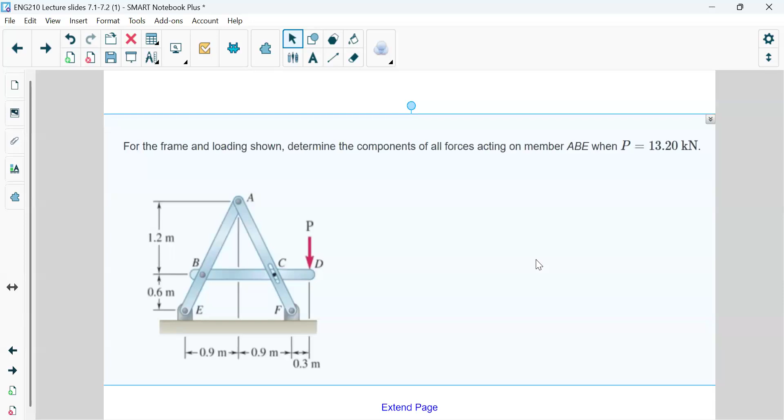Okay, so this is a homework problem out of 6.3. So let's look at this - I told you it was out of 6.3 and it does say for the frame. So we're assuming nothing is moving on this problem, correct?

All right, so let's think about the steps we're going to take to solve this problem. What would be the first thing we would need to do? Reaction - we're going to want to find those reaction forces. So let's go ahead and do a free body diagram and solve for our reaction forces. Blow this up so I can actually see it.

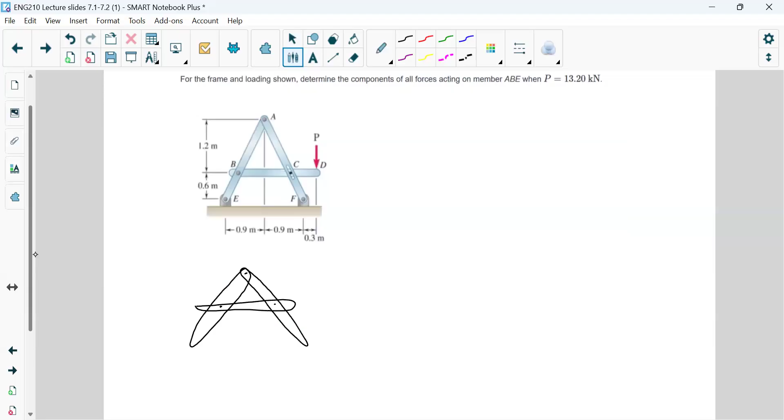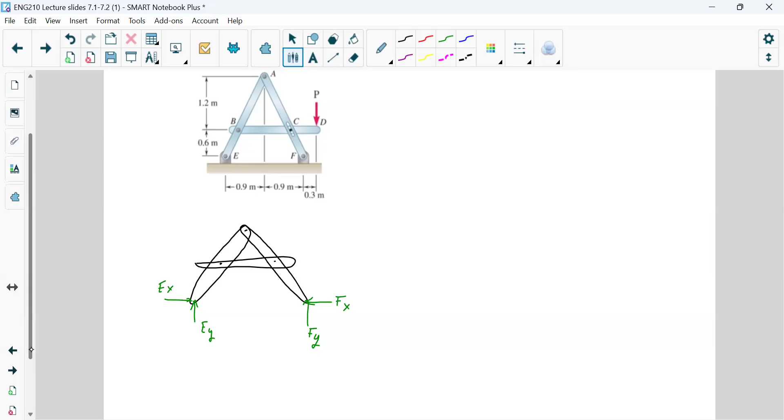All right, so our free body diagram is gonna look something like this. And then what Ben and I were talking about before class was we're gonna start by solving the reaction forces, treating this as one unit. At E, that's a pin connection, so we have an EY and an EX. At F, we also have a pin connection, so we have an FY and an FX. And then we have P, and your number might vary from mine, but P is 13.20 kilonewtons, and P is offset from X.

So let's go ahead and walk through this one. Let's go ahead and start by taking a moment - we're only going to be able to solve part of it, but that's okay, it's going to give us some information to get started. Let's go ahead and take a moment about E.

All right, so our moment about E, we're going to set that equal to 0. So my Fy is then going to be off by 1.8 meters, and I'm seeing this is 0.9 here and 0.9 there, and it's going to be turning, I believe, counterclockwise. So my Fy times 1.8.

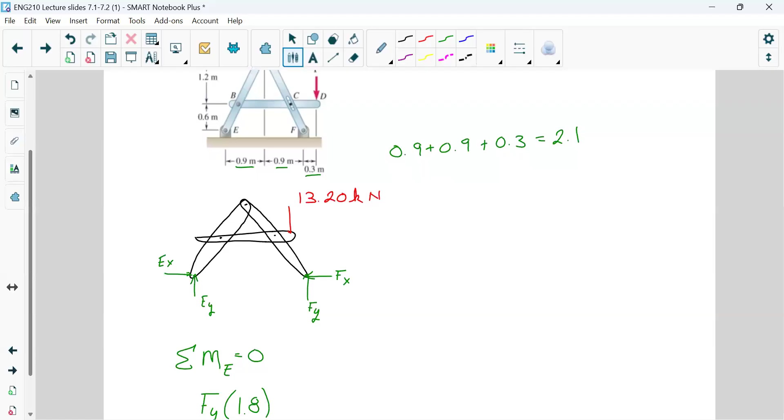The 13.2, that's also gonna contribute, isn't it? So that's gonna be pushing clockwise, and it's gonna be off - we're gonna have to add all three of these together. So that's 0.9 plus 0.9 plus 0.3, which is 2.1. So that's going to be minus 13.20 kilonewtons times 2.1 equals 0.

Okay, put that into a calculator. I'm seeing Fy equals 15.4 kilonewtons.

Yes, all right. We can then, if we sum in the y direction, get our EY. So we're going to have EY plus 15.4 minus 13.2 equals 0. So EY is going to end up being negative 2.2.

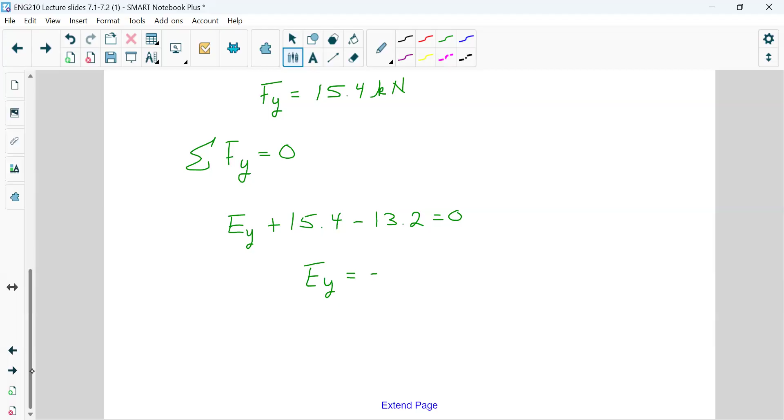All right, so this is now going to be pointing down, and it's 2.2. You didn't do FX because it's on the line of action, right? Well, FX was on the line of action when I took the moment about E. We're also going to run into another situation. If we sum in the x direction, we're going to have EX minus FX equals 0. And it wouldn't matter—if I took the moment about F, I'd have the same problem.

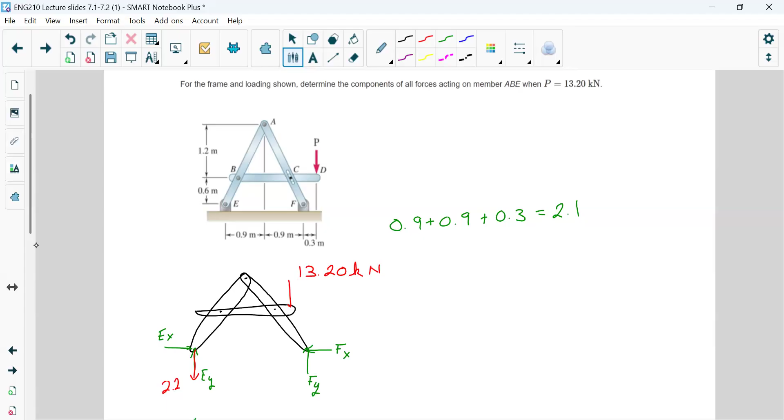So we're unable to go through and solve that. We do have a little bit more information though. Now, this is a frame. So what do we do when it's a frame? We're going to explode it—take it apart. Let's go ahead and do that.

So we're then going to have... let's see... BCD, where should we start? I guess it doesn't matter. So let's go ahead and look at this—this is going to be one of our pieces, right?

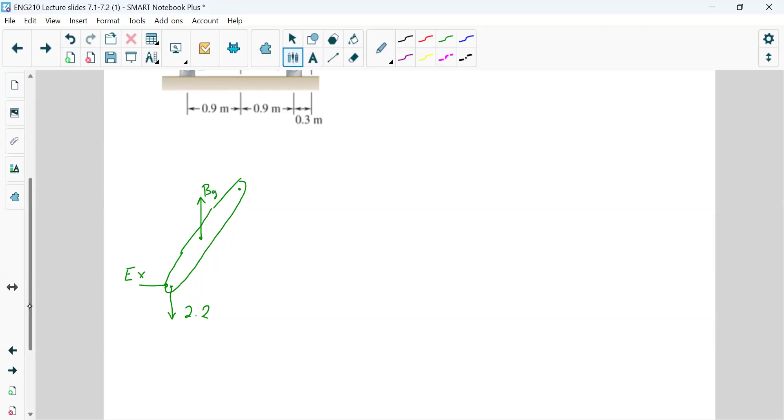We know EY is going this way at 2.2, right? I do not know EX. Here I have a pin connection, so this is going to have a BX and a BY. And up here, that's A, and that one is going to have—oh, I should have drawn those in tension. So here we're going to have AY and AX, right? So that is our first diagram, so to speak.

We take the moment about A. We're not going to get very far, are we? If we look at this one and think about it, because BY, BX, and EY are all going to contribute, right? So we don't get down to one variable, do we? If I take a moment about B, same thing. If I sum forces in Y or X, we're also going to have multiple variables. Does everyone see how we're going to run into trouble? So we need a little bit more information to be able to solve this particular segment.

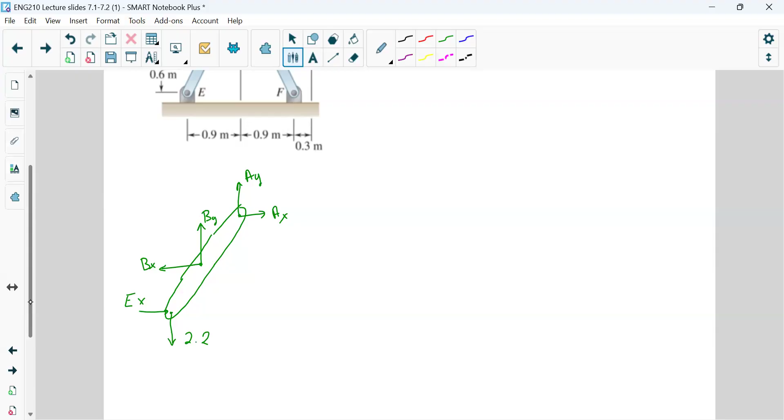So let's look at this segment here. I know I then have a BY and a BX coming in here. I've got the P hanging out on the end. So I have information on this one.

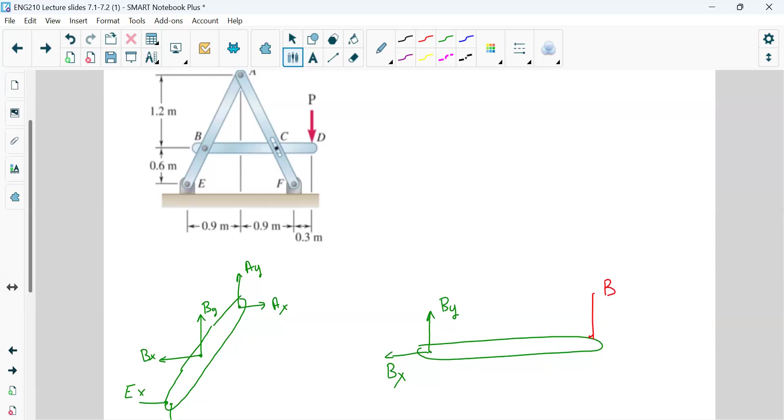And then we're going to have to talk—and this is one of the things that you brought up—the fact that it's got movement on a slant, doesn't it? So it is limited on the slant, but it doesn't clearly have a motion that's free, for lack of a better term.

Oh, this is a P. So this is 13.2, right? Okay. All right. So C is going to have both an X and a Y component to it, because it's a slit on an angle. If the slit was vertical, it would only have an X component. If the slit was horizontal, it would only have a Y component. But we have this angled slit.

So let's go ahead—this one I think I can work with. Why? Well, if I take a moment about B, what's going to disappear for me? CX. And all of B is going to disappear, and I can solve for CY, can't I?

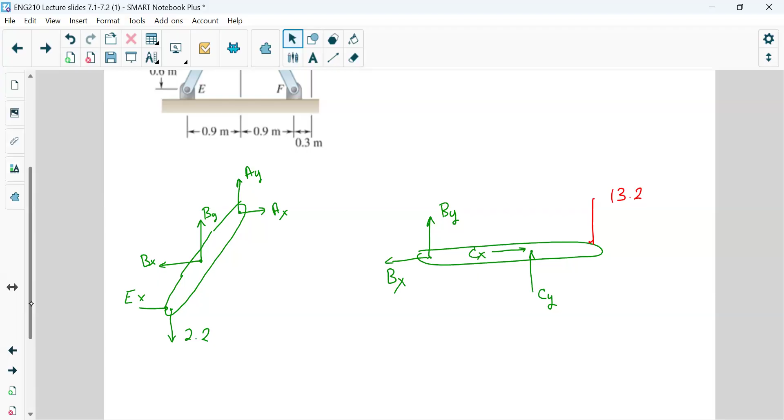I don't think it gives us the measurements on C, so we might have to take a moment at C. But we can figure out what those are. Let's try. So we know—we can figure, well, actually know that this is an F. So we'll have to use similar triangles.

Right, so if this is F here, and this is A, we know that this is 0.9, and this distance here is going to be 1.8. And so then we're going to have a secondary smaller triangle. This is going to be 1.2. This is unknown, but this is still A, so that angle isn't changing. All right, so if we then have 1.2 times—let's see, so we can run this, can't we? So we have 1.2 is to 1.8 equals X is to 0.9. X is going to be what? 0.6?

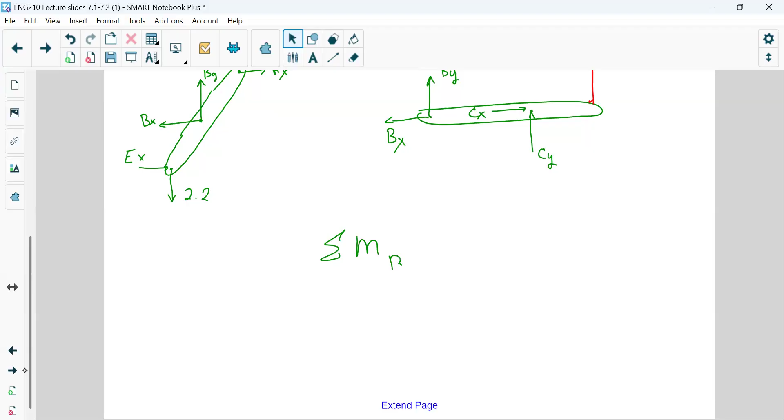All right, and then we're going to have CY times 1.2, and that would be going counterclockwise, minus my 13.2 times 1.8. That's going to equal 0. So I believe we get CY 19.8. Anyone getting 19.8 for CY?

Okay, so if we're taking a moment about B, we need to look for anything that's a perpendicular force to B. So CY is going to be a perpendicular force to B. And so is P. All right.

So we now have our CY. Can I get my BY now? Yeah.

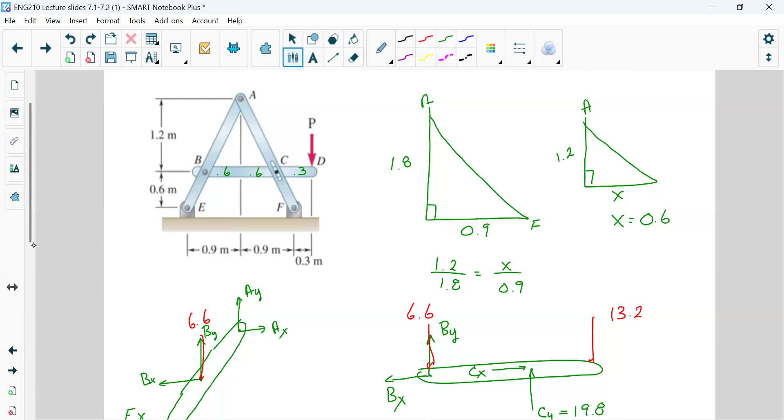That's at an angle, 2CX equals CY. Curious about where he got that from.

All right, so let's go ahead. I'm hoping we can go after CX and BX from another route. We can go back to this one and we can get AY, can't we? Right? If we go back to this diagram. So if we now sum in the Y direction, we're going to have AY, which is pointing up, minus 6.6 minus 2.2. So AY is going to then equal 8.8 kilonewtons.

For CX, could you not use a triangle to find it? Yeah, I'm thinking so. Okay, and they said I did it wrong.

So we have 6.6 pointing down here. Is it reversed on? Yes, it is. Or not? So it's going to be going up here.

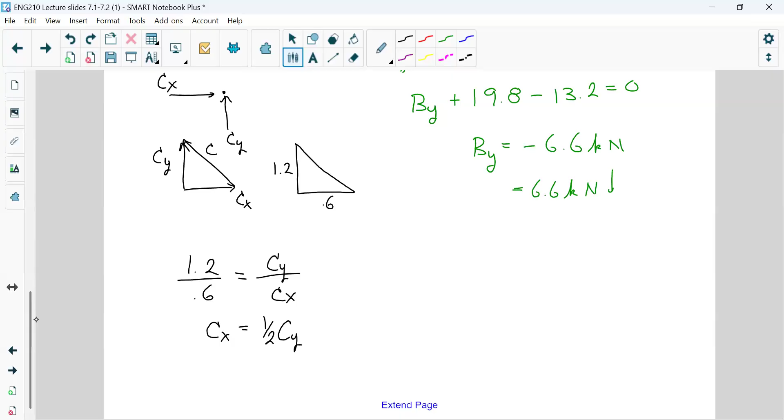Yeah, cause the left side just goes to 2. Okay, or it could be CY equals 2CX. All right, so CY, I was right the first time, equals 2CX.

We know what CY is. CY is 19, so half of that is going to be my CX. So what's CX going to be? 9.5. Wait, you said it was 19? Well, yeah, we found CY 19.8. 19.8, it's 9.9. 9.9. Is it? Yes. When did you stop writing?

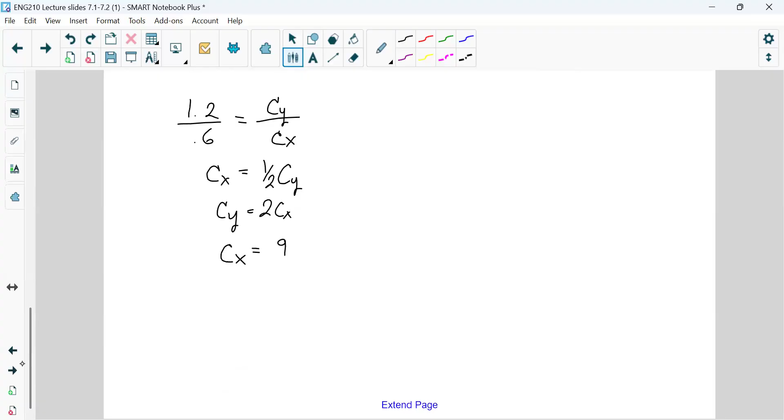Okay, so let's go back up to here. CX is then going to be 9.9 kilonewtons. Now, can I solve for BX? You read it. Yes, no, not theoretically. We can now solve for BX.

Oh, yeah, it just. Hopefully your work is much neater than this.

All right, so that's going to be negative BX plus 9.9 equals 0. So BX is then going to be 9.9 going in that direction. All right, cool, so this is now 9.9 going in that direction.

So now we can take a moment about A or E in order to get AX. Is that going the other direction? BX is going that way, so yeah, it's gonna go this way.

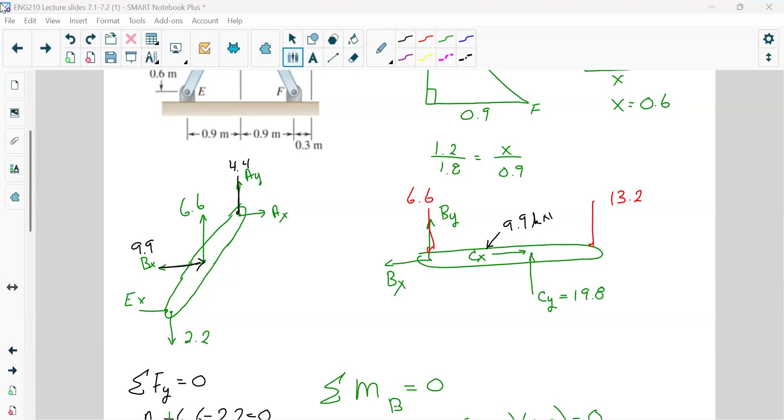Wait, why would it go that way if what we found was a positive number? Wouldn't that mean that we drew it wrong? Because the way I drew it over here was negative, goes in the negative direction. It's reacting, like you have a beam. All right, so let's grab this guy here. You know how it's drawn on this, remember, it was the opposite on that. Yeah, cause it's like when you got two forces going together, so you flip. On one it's going that way, on the other it's going that way. Oh, so yeah, however it is on one, it's opposite on the other.

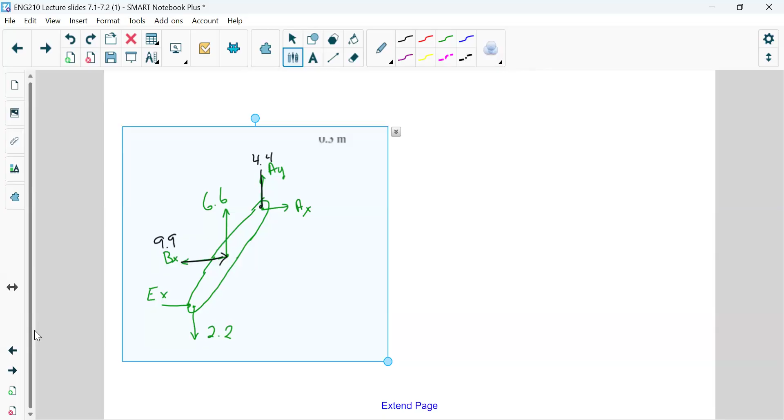Yes, okay, let's take a moment. Let's go ahead and take the moment about A. Right, we're gonna have to figure out some distances. No, we don't, we already know them.

Moment about A equals 0, right? We know this distance here, we already found. That was the 1.2 distance, correct? And this distance here is 0.6, right? Yes. And E sub x is then gonna be off by 1.8, right, because the 1.2 and the 0.6, if I'm taking the moment about A. All right, so this overall distance here is gonna be 1.8.

All right, so we are then going to have, if we're going about A, all right, so that's gonna be 9.9 times 1.2. Right, and then we're gonna have, that one's going clockwise, isn't it? Minus 6.6 times 0.6.

All right, and then we're gonna have, let's see, what else do we know? That one's 2.2, so that's gonna be counterclockwise, isn't it? So this is gonna be then plus 1.8 times. Oh, wait, I'm looking at the wrong one, aren't I? EX is gonna be times the 1.8. All right, and then we need to look at that offset 0.9. Okay, so then we're gonna have the 2.2. And I think that's positive, is it? Yeah. Equals 0.

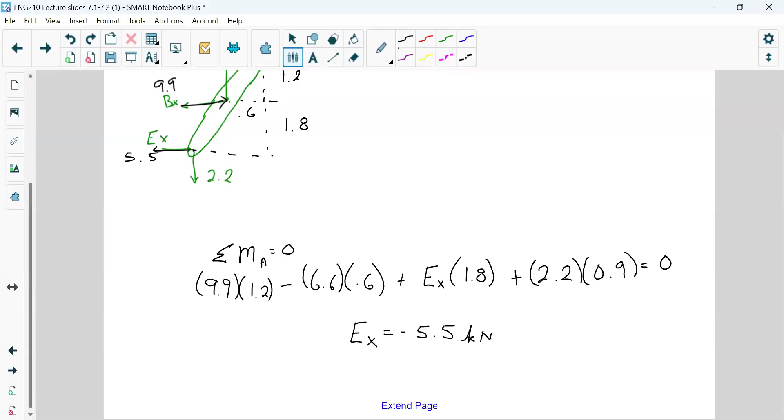So can I now find AX? So if I sum in the X direction, right, what are we gonna have? We're gonna have 9.9 minus 5.5. How did I write that? How did I draw it? I drew it positive. Plus AX equals 0.

So AX is then gonna be negative 4.4 kilonewtons. Did I do that correctly? All right, so this is going this way, 4.4.

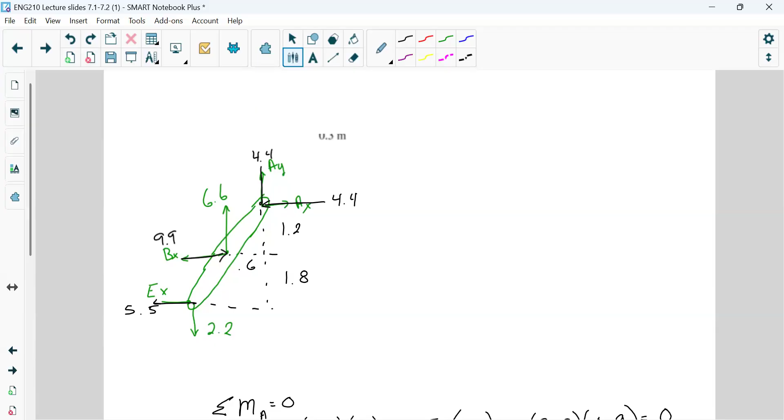Cool beans. Now, we're almost done because the only thing left to solve for is f of x, and we can go back to this one here because we just found EX. Which way was EX pointing? To the left, and it was 5.5. Yes.

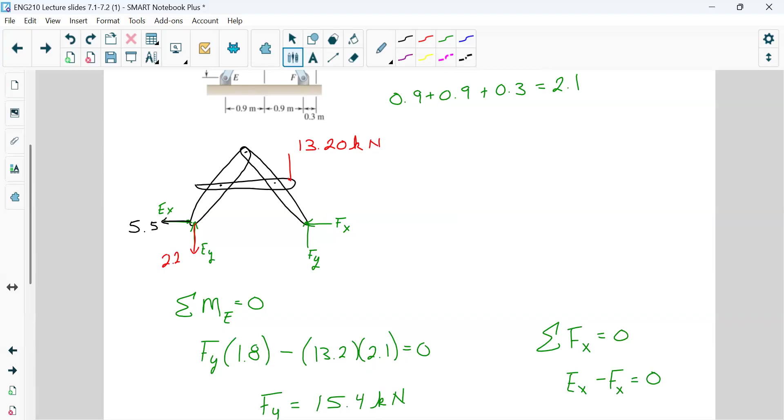All right, so if we now sum in the X direction, we know this is negative 5.5 minus f of x equals 0. So f of x is then going to equal negative 5.5 kilonewtons. So this is actually going the other way, right?

Yep, there you go. So now you solved the whole thing. All joints are solved. I was just confused on like that slider joint. I thought it was a reaction force, so I counted it and started from the beginning, but I understand. Okay.

All right, so now that was a good problem to lead us into our frame problem. Did we find the reaction forces on our frame problem? What do you mean, we found most of them?

Well, we found the left frame, a little bit, parts of the left side. Right, are we calling the forces after the joints react? Yeah, all right, so tell me what we found. No, those are forces, those are just forces. Yeah, similar reaction, all right.

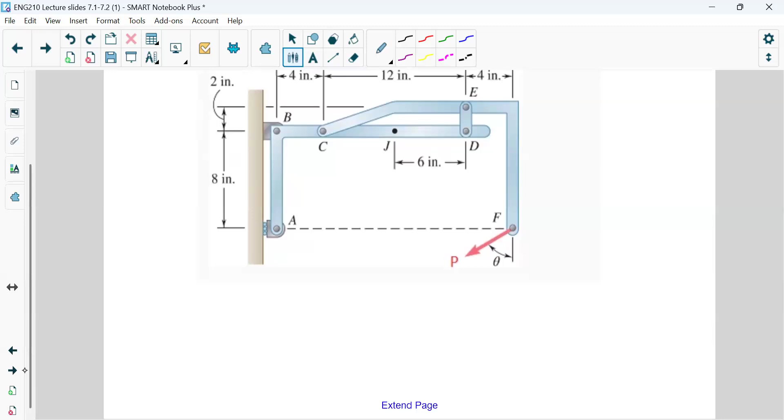Here's some notes. Okay, so it looks like we found BY and did we find BY and AX and BX? Is that correct? Yes, all right. So what do we know? Let's go ahead and give ourselves a free body diagram. And then did we show, oh, and then we need to solve for J with our internal forces, correct? Yeah, all right, and so I believe, did we leave off here?

Right, so A was 155. B was 155. This was 62. Here we're going to have a CY and a CX, and then here we're going to have a DY.

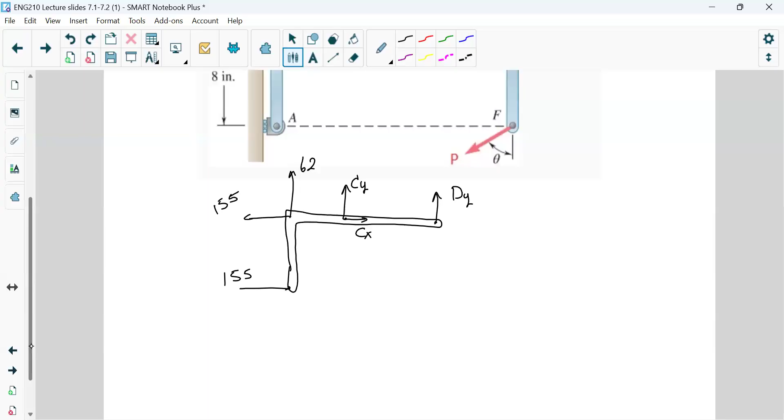Yes, all right, let's take a moment about C, because then I can solve for dy. What I'm looking at is, well, we could solve for all of C, but our point J is here. So if I cut it and solve this side where dy is coming in, or going out, drawn the other direction, we can figure out what our internal forces are. So let's take a moment about C.

All right, so what's going to affect C? Well, that 62 is going to affect C, isn't it? And it is off by 4 inches, and it is going clockwise. Did I do that correctly? Yes.

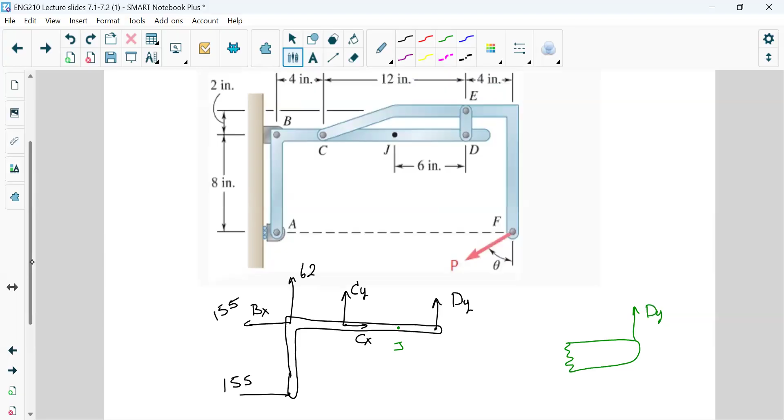Now the BX, that 155 here, this one isn't going to be affected. It's not going to be part of it. Why not? Okay, it's on the line of action, isn't it? So we're only going to have to find DY. AX is off by 8 inches.

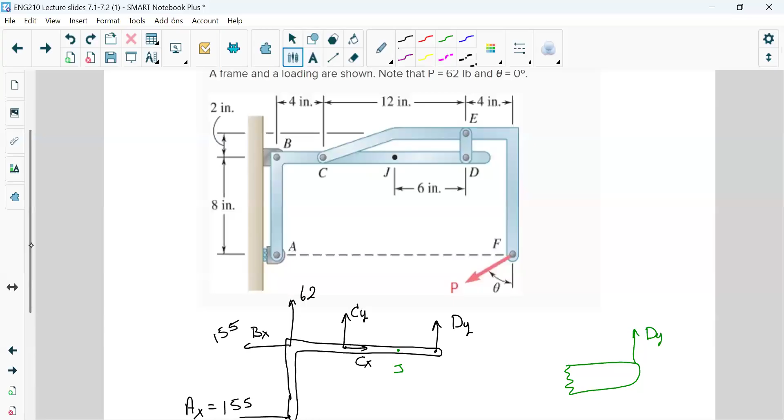All right, so if we're here at C and we have AX going this way, we're going counterclockwise. So that's going to be plus 155 times 8. And then we're going to have D. I drew D going up, which is going to make it a clockwise motion, so we're going to have dy times 12. All right, go ahead and solve this then for dy.

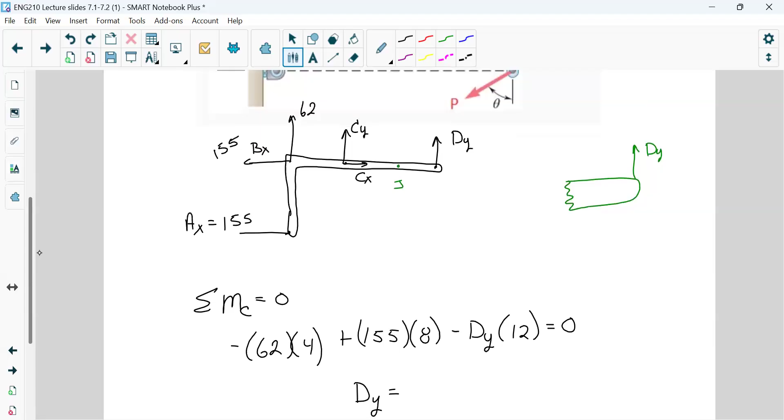It should actually be pointing down. I drew it the wrong way. On your notes, when you previously did a little bit of it, you called it FED. Okay, that's the same thing, right? Yeah.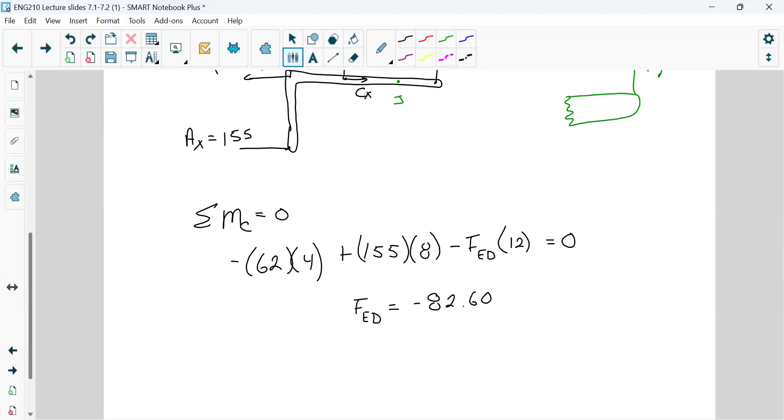So what did you come up with then for that? Negative 82.67. Anyone else get that? Yes, yes. Okay, that'll work. Negative 82, which means I drew it in the wrong direction, correct? It's actually going to be pointing down.

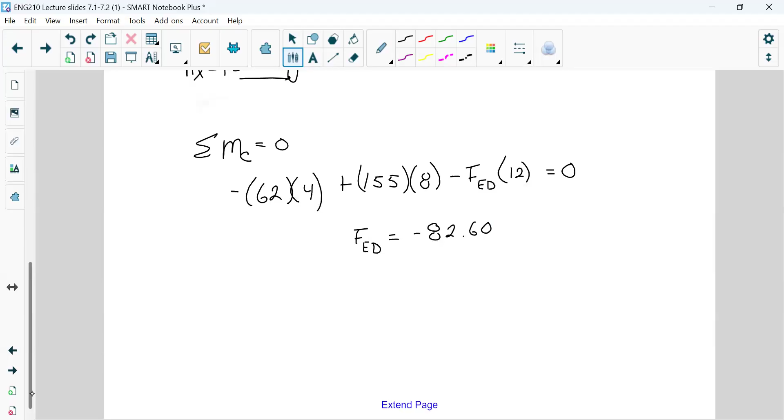So now we have the information to make our cut at J. J is given to us as where the cut is going to occur. All right, so this is my cut at J. Here, my FED is then equal to 82.6 pointing down.

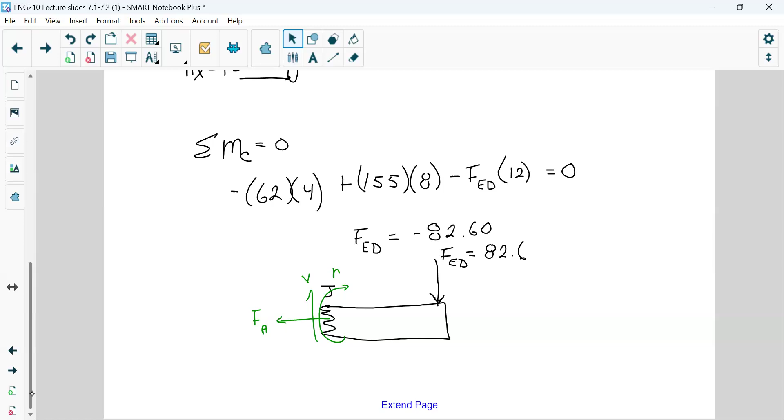All right, so we are then going to have three forces happening on the inside: shear, axial, and moments. So we're going to have a shear force, we're going to have an axial force, and we are going to have a moment. All right, so let's figure out what these are.

My handwriting is horrible. This is 82.6... 82.7... 6, 7. Okay, but we can round it to 82.7. Yes. All right, the moment is the bending force, right?

No, the moment... the shear is the vertical force, right? And then you have the interior bending moment. So that you're looking at resistance, right? You're looking at it not bending, sort of like when it's embedded in a wall.

All right, so let's go ahead. If we sum in our x direction, then our axial force for this is going to be 0. Our shear force is in the y direction. So then we're going to have shear minus the 82.7 equals 0. So my shear force is drawn correctly, and it's going to then be 82.7.

Are we in newtons, not kilonewtons? Pounds? Okay, we're in pounds.

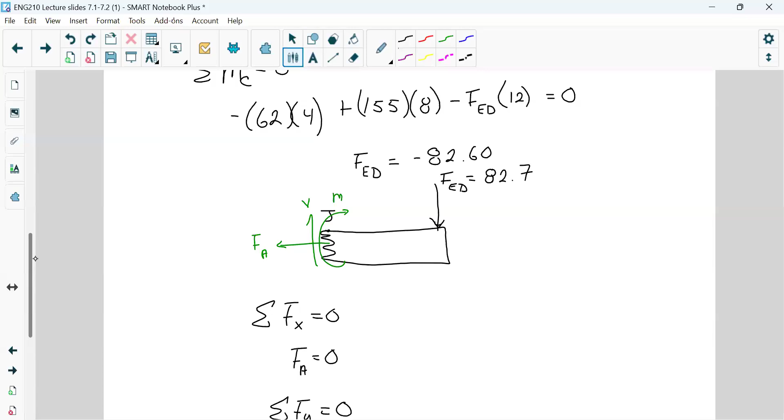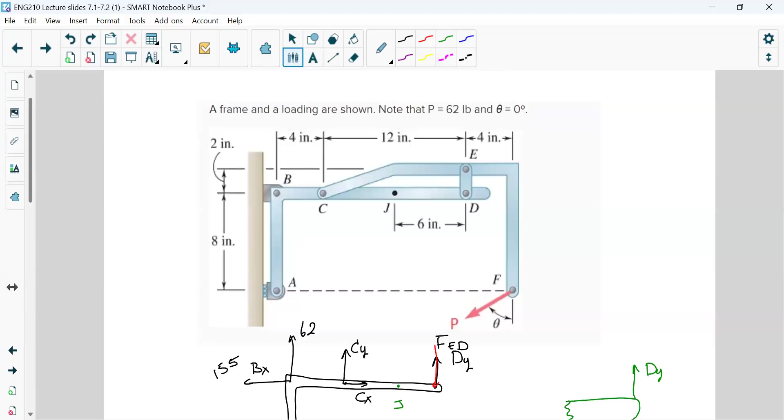All right, finally we need to figure out our bending moment, don't we? And so that is going to cause, the 82.7 is going to cause a clockwise moment, and it is off from J by 6 inches. So we can say our moments have to add up to 0. So we're going to have the moment on the inside minus the 82.7 times 6 equals 0.

Was the 6, is that the right number? Yeah. So that's going to give me the moment on the inside of what? And you're taking a moment at the breaking point? Mhm. Okay, what'd you guys get? 496.

496.42? All right, this is in pounds, inches, which actually makes me nervous, but we'll leave it alone. That's 0.2, not 0.42, just 0.2. All right, so your author has a tendency to leave things in pound inches. I would really like to divide that by 12 and have it in pound feet, just because that's a much more standard way we refer to moments.

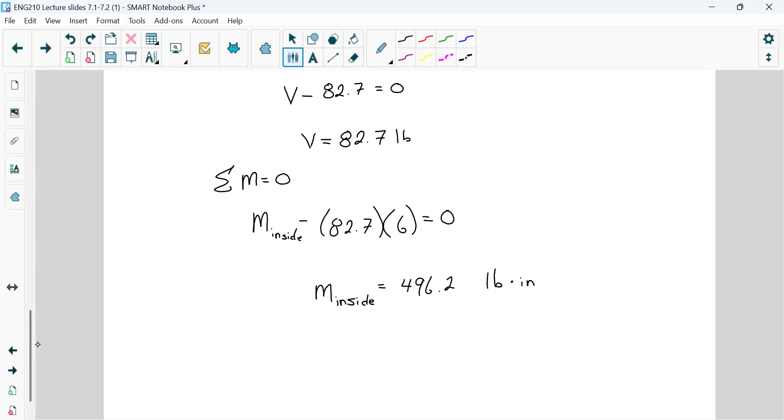All right, is that what it wanted to know? Yeah, that's what it wanted to know. Let's do a quick review because we did dive into this problem, and we're going to need to understand it to move into the next section. What it wanted us to do is find the interior forces—internal forces, I'm sorry.

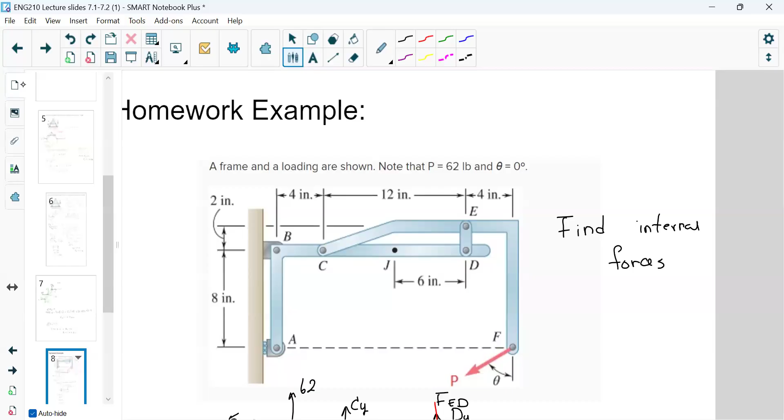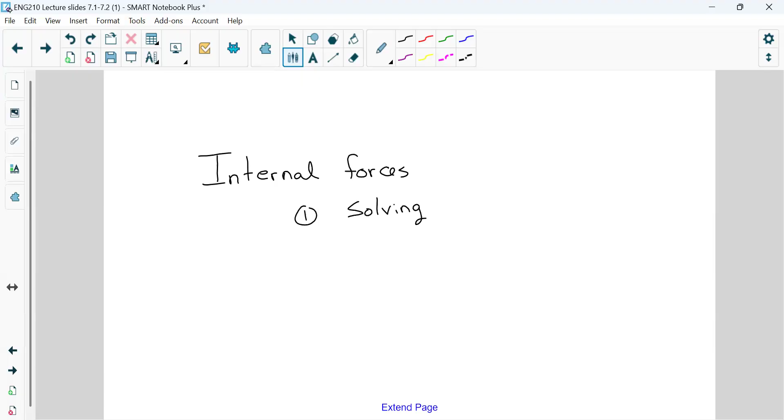There are more than three internal forces total, but we're focusing on three. So whenever you see the words 'internal forces,' what we're going to start by doing is solving your frame, or whatever you're working with. Then you're going to want to cut it. When you cut it, it doesn't matter which way, there are always three internal forces.

The three internal forces are an axial force, a shear force—on your free body diagram, your shear force only has half an arrow associated with it—and a bending moment, or its resistance on the inside to actually bend. If I'm hanging onto this pin and I put a force here, internally it's resisting actually bending, isn't it? So that is what we have.

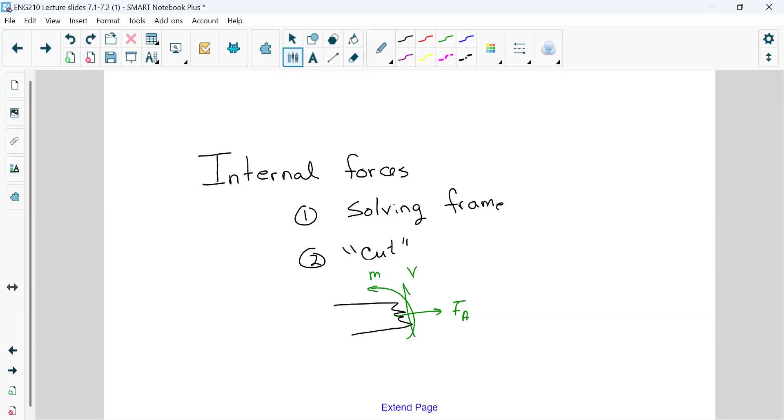So let's look at one where we're just going to cut it up, and then we'll move into the diagrams. Let's say—and your author, I don't like the way the author teaches this, just being honest, this is the only time I diverge from him—let's say this is...

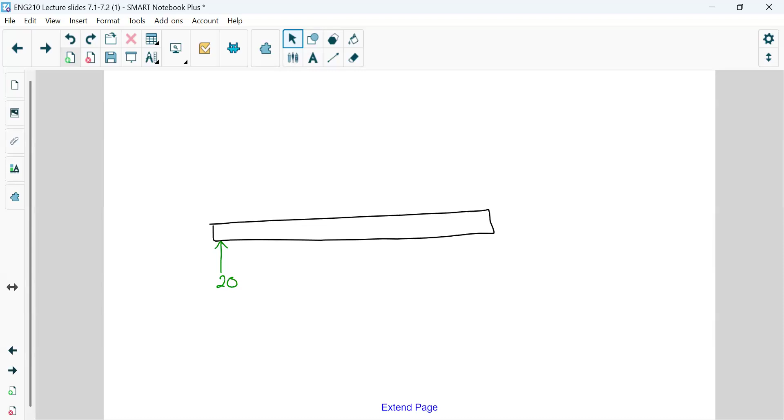Let's say this is 20, let's say this is 80, and we have a force. I probably shouldn't do it this way. Let's just redo this. We'll make each of these 50, and we'll put the force in the middle: 50, 50, and we have an applied force dead center of 100. We can call all of these pounds, and let's say this is 10 feet.

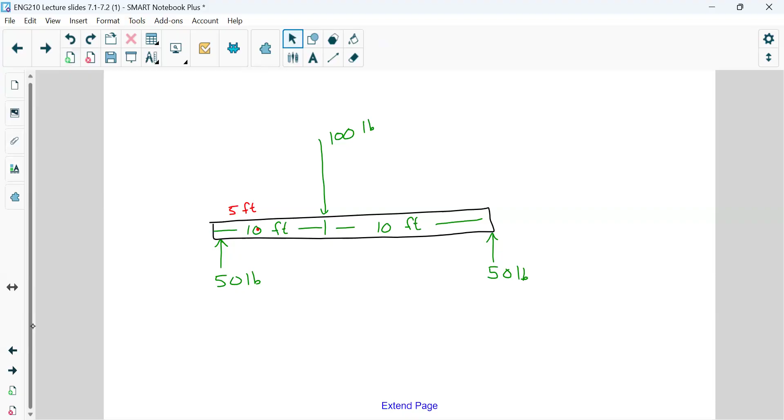Let's say, for example, I want to cut this—you'll be told where to cut it—but let's go ahead and cut this at 5 feet. Let's see what happens when we do that. We're going to cut it at 5 feet. We can solve either side of it; it's not going to make a difference. I want this to work—there it goes.

But if we're looking at it, this is here at 50. There is an axial force here, there is a shear force here, and then there's going to be a bending moment there, correct? It doesn't matter which side we solve for—we could solve for the other side, where we would have a cut.

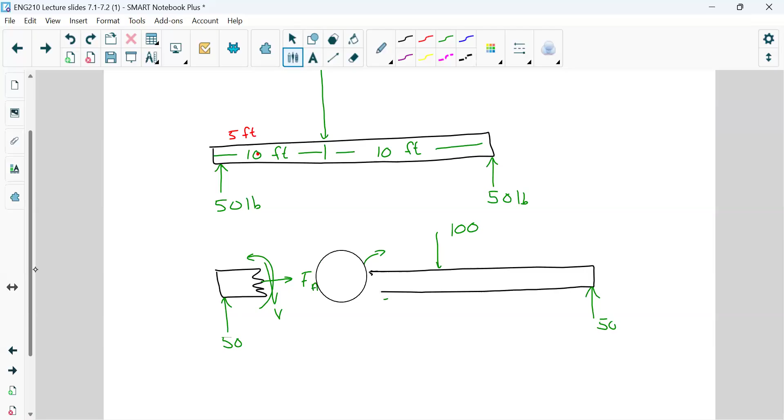And then this we said was 50, this was then going to be 100, right? Once again, we have a shear, we have axial, and we have our bending moment. Oh, my shear is going the wrong direction. They have to be on the same line of action to have the same breaking values—well, they have to be part of the same piece, the same piece of the frame. Does that make sense?

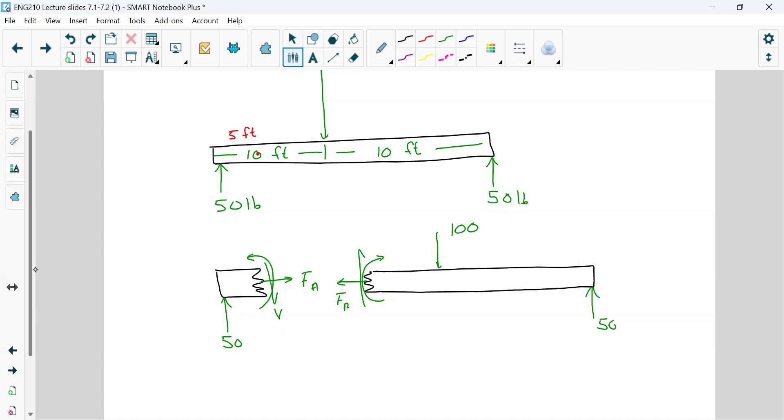So now we have two pieces, and we can choose which one to solve. I think you can see if we sum in the x direction, it doesn't matter which one we work with—my axial force is going to be 0, isn't it? If I sum in the y direction, then I'm going to have 50 minus my shear equals 0. So my shear is then going to equal—okay, so I drew my shear backwards. No, I'm okay, so my shear is going to be 50. If I look at it on this side and sum in the y direction, then I'm going to have my shear pointing up.

Minus 100 pointing down, plus 50 is going to equal 0. So then my shear is going to be 100. So it's going to be 50. All right, you see, it didn't matter which one I solved for, did it?

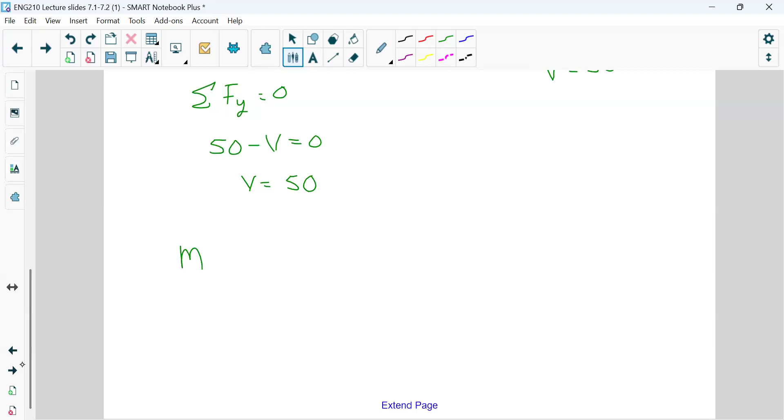If we take the moment on the left-hand side, and the moment is always at the cut, we're going to have the moment of the cut, which I drew counterclockwise. And then we're going to have the incoming moment from 50, which is going clockwise. Is that correct? Yes, and it's off by 3. Equals 0. So here the moment of the cut equals 150, and that's going to be in pounds feet because I set up the units properly.

Because I'm not a dinglebat like the author. All right, so if we look over here for the moment, 100 is going to go clockwise. I have the moment going counterclockwise, the way I drew it. 100, and that's then going to be off by 5, and that's negative, isn't it?

What? For that left side, that distance is 5 feet, right? Oh, is it? Yeah, oh sorry, I don't know why it became 3 in my brain. You don't even, I don't think you declared a distance at which to do the cut. Yeah, I did, I did. I said the cut's going to be at 5 feet. I don't know where 3 came from. So this needs to be 5.

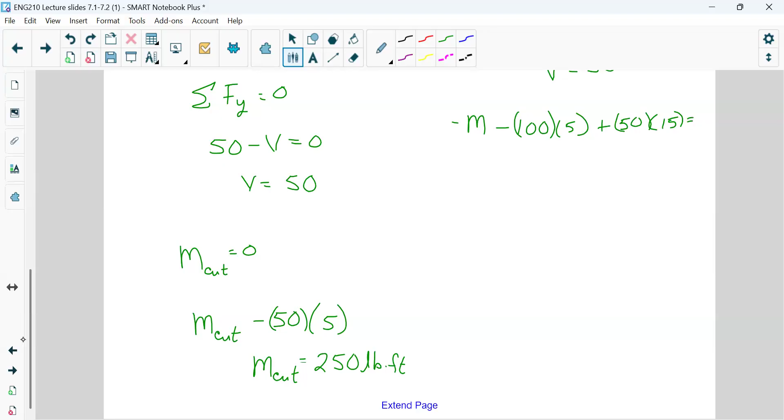So this becomes 250. So then this is minus 100 times 5, plus, and then we're going to have 50 times 15. I got, it's going 10 to 100 and then another 5, and it's going counterclockwise. So this is going to give us minus 500 plus, and then I need 15 times 50. 750? 750, perfect.

Equals 0. So you'll notice my moment here is then, this is negative moment, it's going to be negative 250 pound-feet. So my moment here is then 250 pound-feet. It didn't matter which side I solved. Okay.

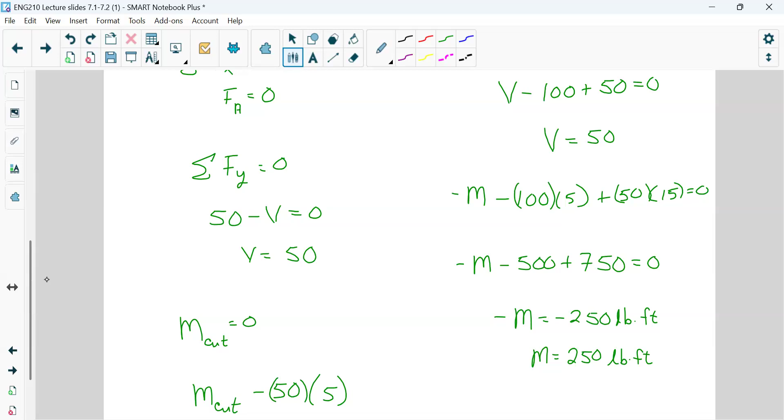All right, now what the author likes to do, we're going to start talking, I'm going to teach this to you graphically. Because the author goes, well, if I want to figure out what's happening across the beam, I then have to take a point there. And let's take a point here, and let's take a point here, and let's take a point here, and there. Because he doesn't believe that you have had calculus, to be very honest.

All right, what? I don't know. But he honestly, truly doesn't believe you have calculus. So he will take a whole bunch of points along it.

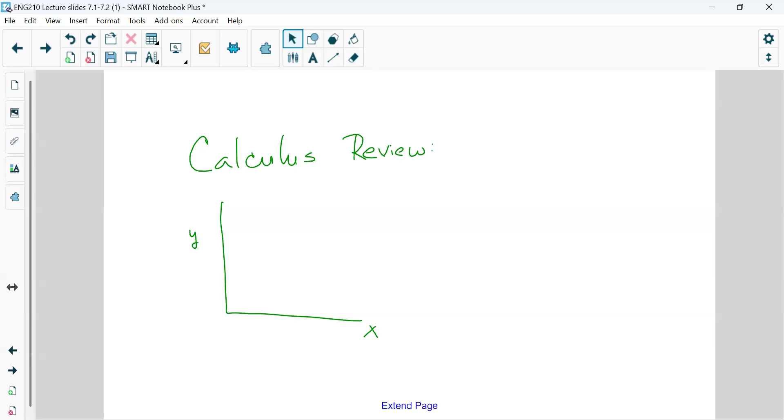Instead, I want you to use your calculus, not in a scary way. Let's do a quick review. All right, so this is your calculus review, Calc 1. It depends, some of you, it might have been a little while since you've done this. If I have X and Y and I say that X is here, or not X, but I've got a line here...

Y equals 5, what's going to be the integral of that line? The area under that point, area under the curve, what's it going to look like? That will just be a rectangle. The area will be a rectangle. What will the integral look like?

If I have an expression Y equals 5 and I integrate it with respect to X, what do I get? 5 times X. So it's going to look like this. It's going to be a straight line up, isn't it? Right? Where the slope on this line is then, this line can be described then as 5X, can't it?

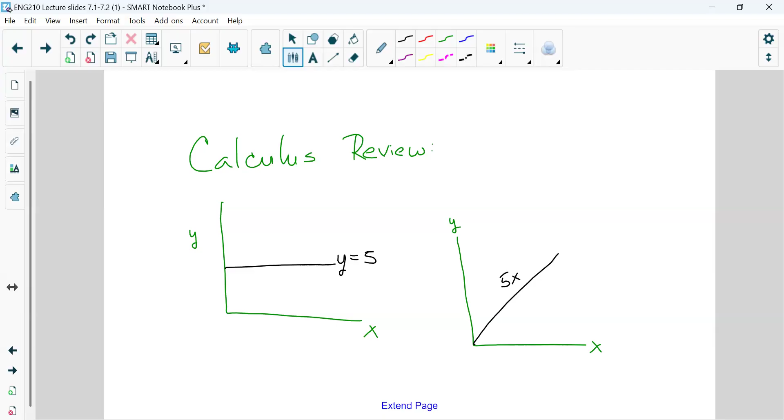Let's take it one step further. All right, let's integrate that one. So if I have a straight line, what's it going to turn into? 5x squared over 2, 5x over 2 squared, isn't it? So graphically, it's going to become a parabola, isn't it? Okay, so this is then y equals 5 halves x squared.

But I want you to look at this. We go from horizontal line to a straight line, correct? To a y equals mx plus b line to a curve. Question, Kate? No, to stretch it.

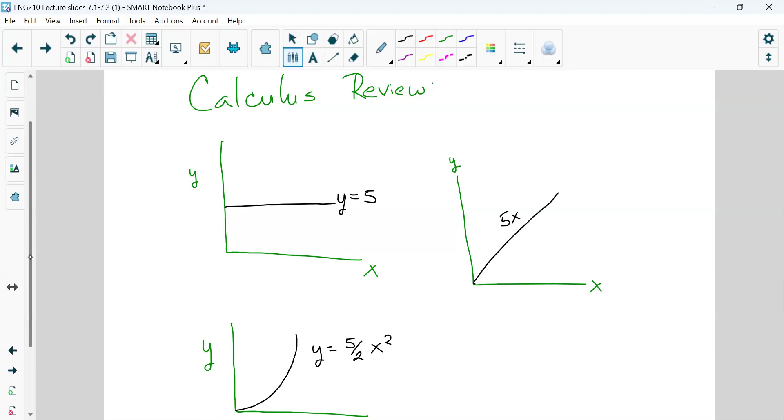All right, what happens? Let's think about this in terms of, we're going to do shear and bending moment diagrams. Now, my attitude is use your calculus. The author's going to make you determine a whole bunch of little points. All right, and I think that is, I don't want to say it's a waste of time, but it's a waste of time. I don't know any other way to put it.

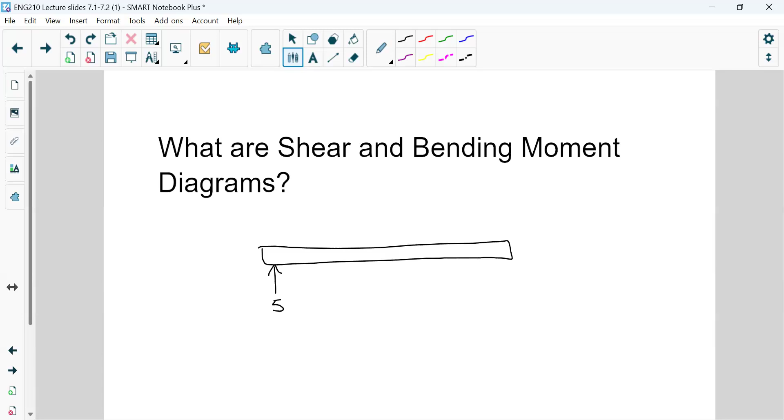Okay, so here is what you're going to do. And you can think of it, if we go back to this diagram here and say this is 50 and this is 50, right? And over here we have 100.

You could do this probably in your head. At this point, we're going to have a shear of 50, aren't we? At this point, what are we going to have? A shear of 50. At this point, a shear of 50. Then we hit this thing, so now we're going to have a negative shear, aren't we? Because now we're pushing down by 100. This here is a critical point. These are my critical points.

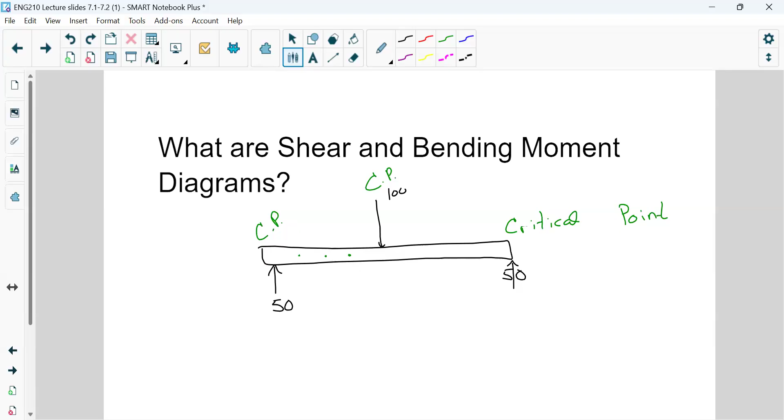So I want you to draw your shear diagram right under. What's happening? I'm going up by how much? 50. This is my next critical point. Now I have to go down by how much? 100, right? Because when we find our shear, we're basically summing in the y direction. So here we're going to go down by 100. That then puts me at negative 50. What happens at the far end? Goes back up to 0. This is my shear diagram.

Okay. Now, all we're doing is we're following what the forces are doing.

Why are people logging in 30 minutes early to 2:32? Don't understand. All right, so...

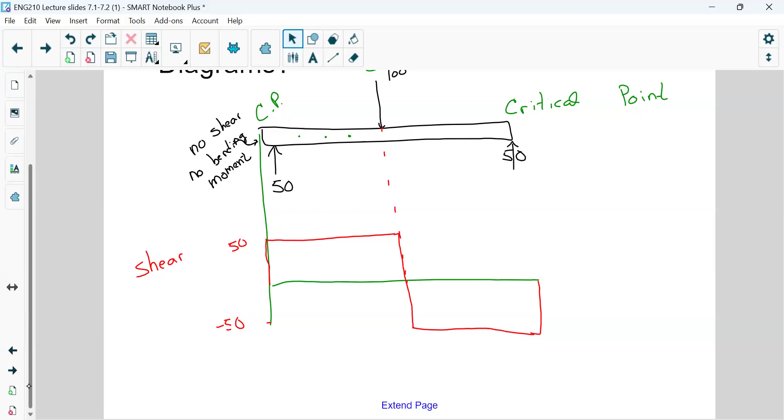This is what, by the way, on the edge, if we're on the end, we're going to have no shear and no bending moment, unless it's in a wall. So your problems are going to start at 0 and end at 0. This is what the author doesn't seem to think you know: the shear is the derivative of the bending moment with respect to x. They are related this way. So you can think of it, your bending moment, if you do separation of variables, is then the integral of the shear.

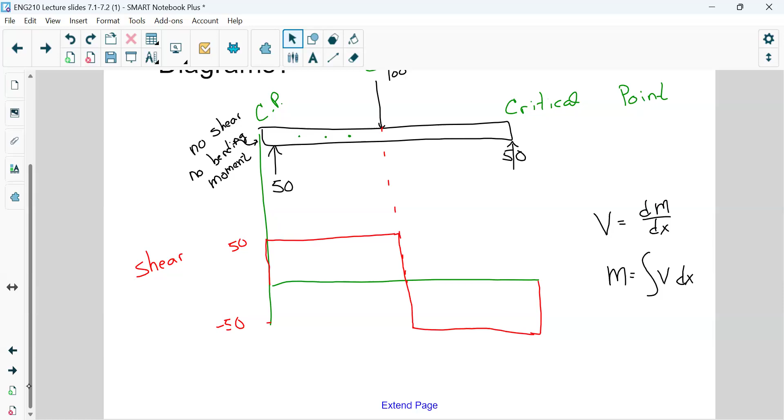Okay, so what are we going to do now? We're going to do the same thing. I'm going to draw my bending moment diagram. So here's my bending. They're not connected though, right? They just happen to be right on top of each other. I'm going to connect them because I want to keep my critical point the same.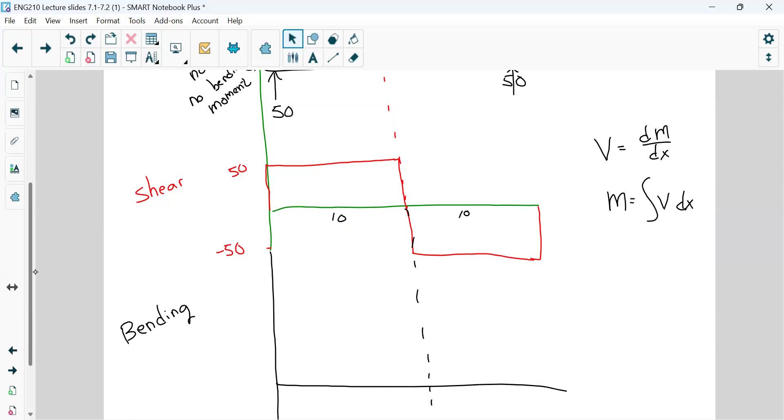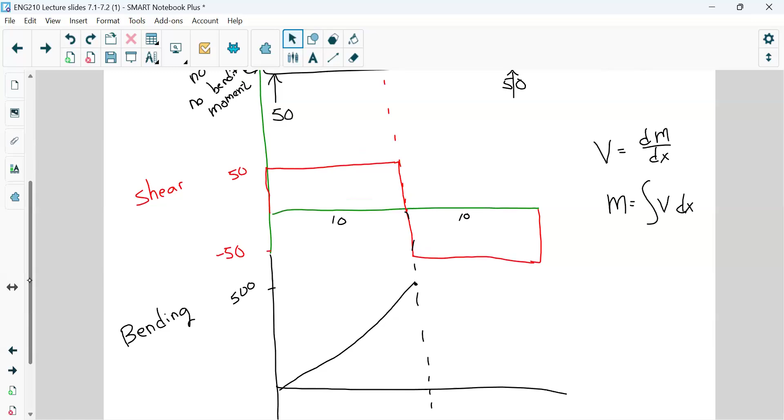If I have a horizontal line, that horizontal line is going to become a what? It becomes a line at an angle, doesn't it? Diagonal line, that's a good word. I know this x is 10 and this x is 10. So what's the area under that curve? 500. So up here, we're going to be at 500. This is going to go up to 500. It is positive x, so it's going to have a slope. This equation of this line is then going to be 50x.

What's then going to happen? It's going to do the opposite. 50x, it's going to go down, negative. This is then negative 50x. All right.

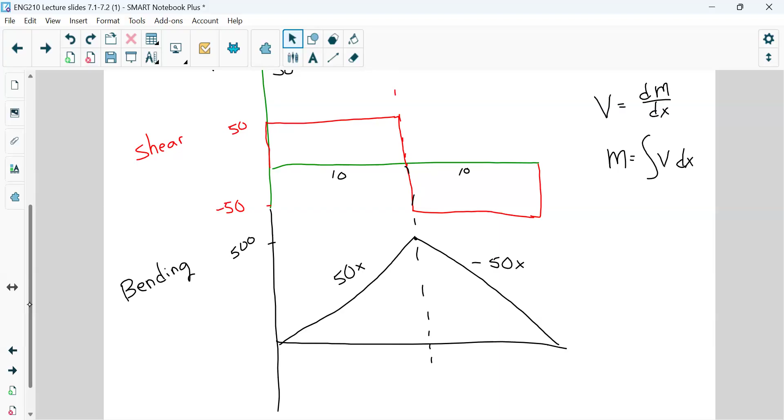So this is how I want you to do the bending moments and the shear diagrams. Your author will have you literally choose like 20 points, you put them in, you calculate it for each point, but you'll end up with this anyway.

It's actually, okay, bending moment—no, this isn't telling us. The deflection. All right, so the integral of this is how much it's deflecting. Internal deflection, which we've done. Yeah, I don't think we talked about the integral relationship. No, I don't think we did either. But it's going to be the internal deflection.

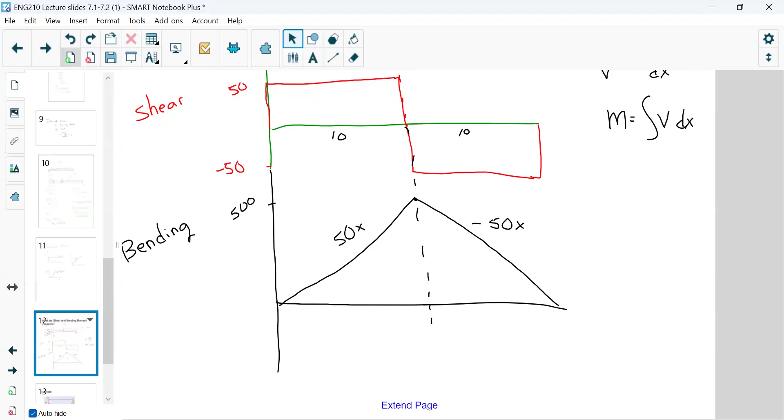All right, this one is pretty nice. Let's do one that's a little more complicated before we get into the ugly ones like your author likes to give you. Let's actually go ahead and walk through this one.

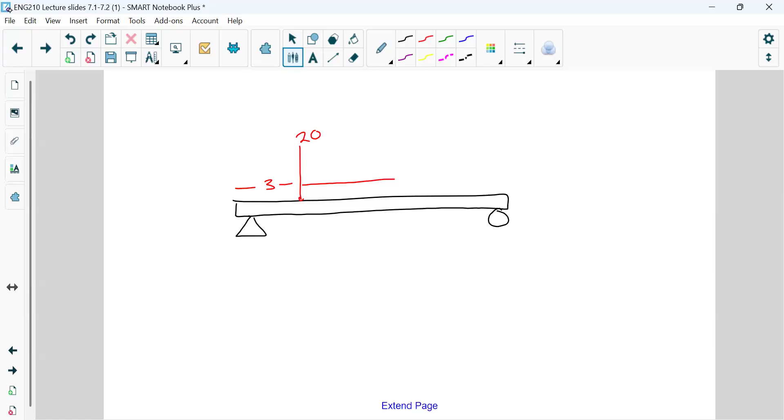Let's say we have 6 minutes, we can do it in 6 minutes. All right, we have a roller here, we have a pin connection here. Let's say we're going over 3 feet and we're coming down 20. We're going over 10 feet and we're coming down 40. And then we're going over another 3 feet and coming down—well, that's it, we'll just have 2 forces. All right, can I solve for my reaction forces?

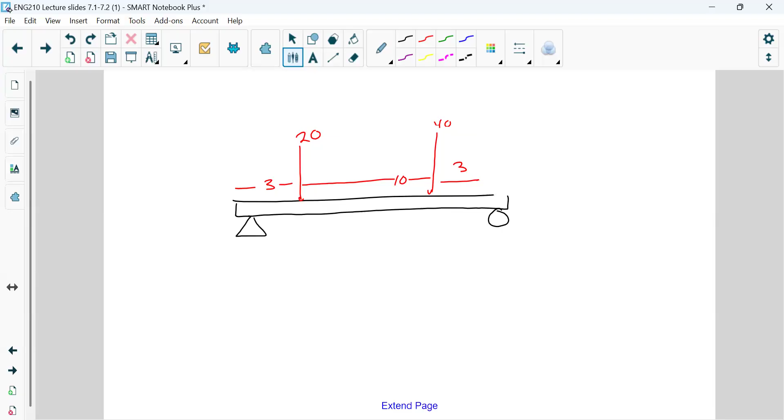Absolutely, we better be able to. This one is going to have, we'll call this A. It's going to have an AY and an AX. AX is going to be 0. This one's only going to have a BY associated with it.

All right, so if I take the moment about A, what are we going to have? We're going to have -3 times 20, then -13 times 40, and then plus BY times 16 equals 0.

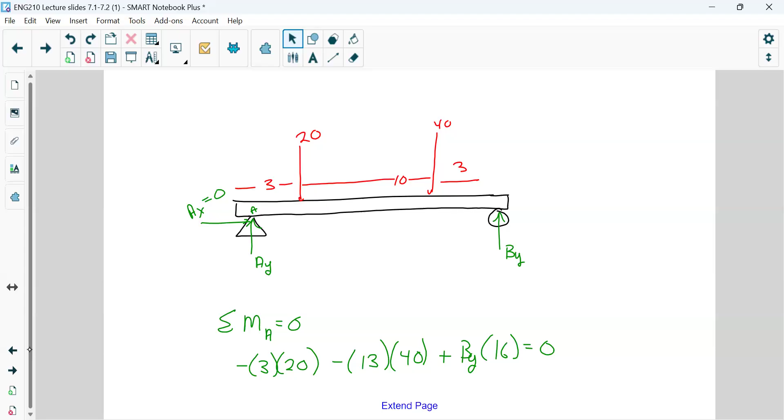So what do you get for BY? I made the problem up, so I have no idea. 580? Oh, that's really high. Did you divide by 16? Oh no, sorry. 36.25. Okay, I buy that one. What was it? 36.25.

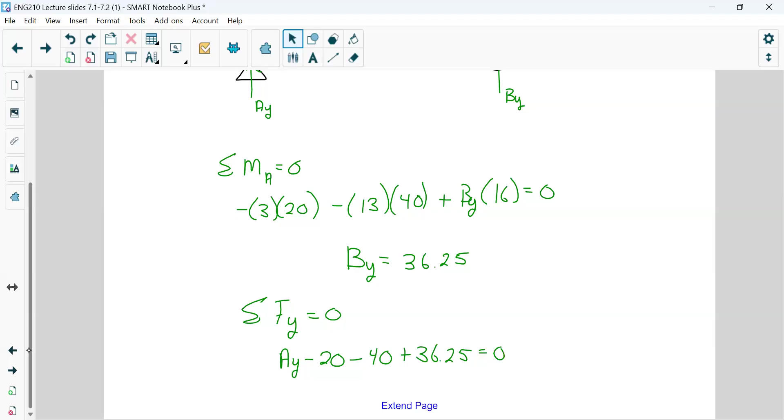All right, now if I sum in my y direction, we have to flip our BY though. It's a negative. Oh wait, no, never mind, we're good. We're gonna have AY -20 -40 plus 36.25 equals 0. So AY is gonna be 23.75. Did I do that right? I did that in my head. That's always dangerous.

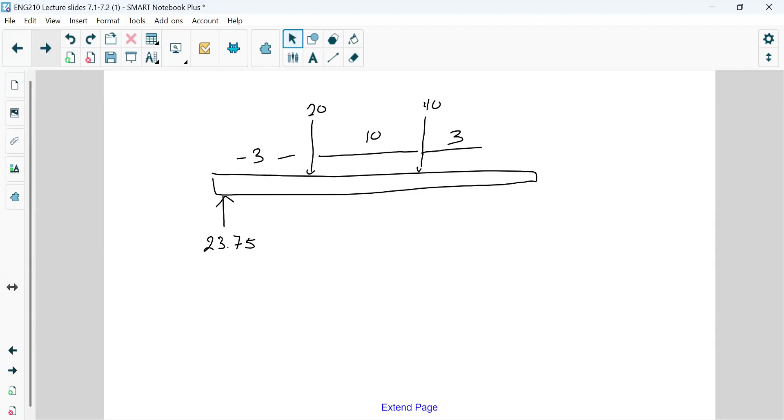Yes, okay, so we found our reaction forces in like 2 minutes because you guys are pros at these now. So what I would do is give yourself another free body diagram. This we found to be 23.75. We go over by 3, and this was 20. We then head over by 10, and this here is 40. We then head over another 3, and here we have a force of 36.25. Okay, so we get our basic forces.

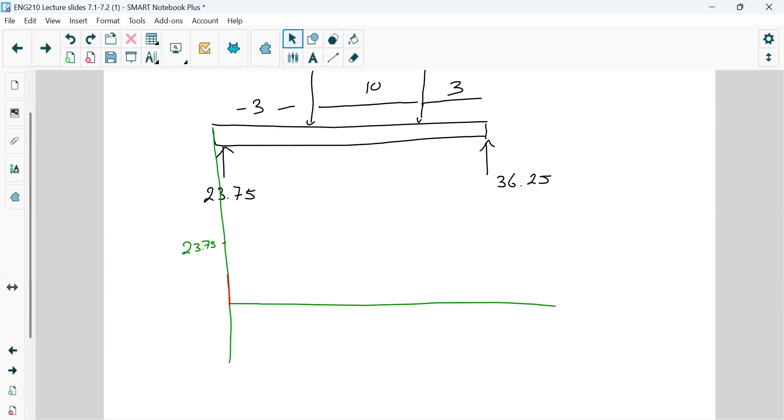Now let's go ahead then and do a shear diagram. We start by going up how much? 23.75. So we're going to go up 23.75, we're going to go over. This is a key point, critical point. This is another critical point. So then we're going to go over to here and drop down by 20. So now we are here at 3.75.

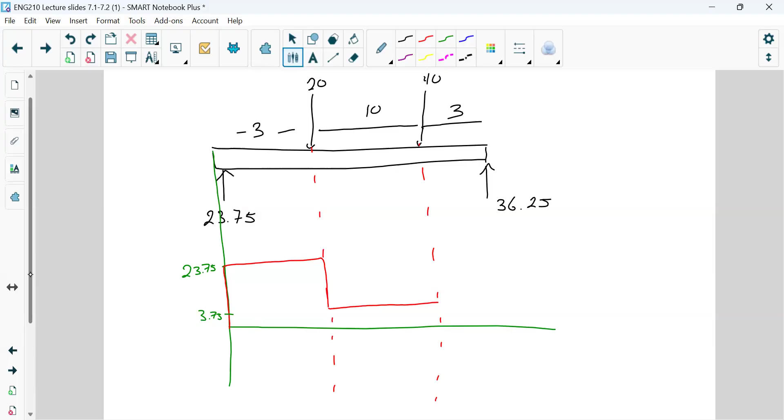We're going to head over to this critical point. Now what do I have to drop down by? 40, and that's going to put me here at negative 36.25. It comes over and then heads back up to 0, correct? Shear diagram, done.

Bending moment diagram. I'll need some calculators run, because now the numbers aren't going to work in my head. This is 3, this is 10, and that is 3, correct? All right, so 3 times the 23.75 is what? 71.25. All right, so I'm here at 71.25, that's going to go like that.

All right, 10 times, that's going to be 37, isn't it? All right, so we're still going up, but at a different slope. So this one is going up here, and this one here is then going to be 71 plus 37, 108. And then I need 36 times 3, and it better be close to 108. I'm doing things in my head though, so that's always bad. What is it? 36 times 3 is 108. Watch. So that's what that bending moment diagram looks like.

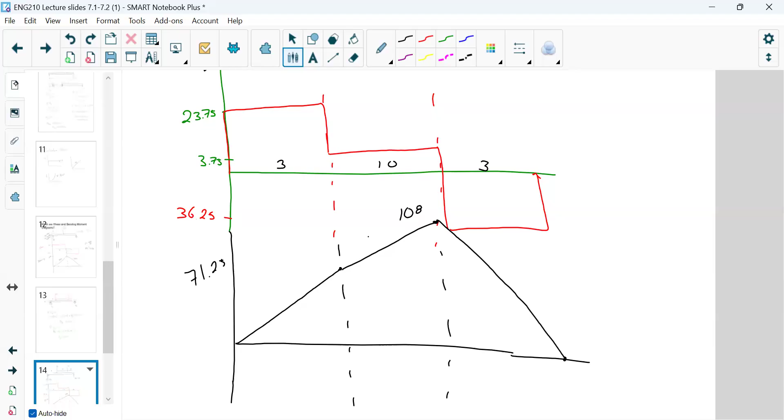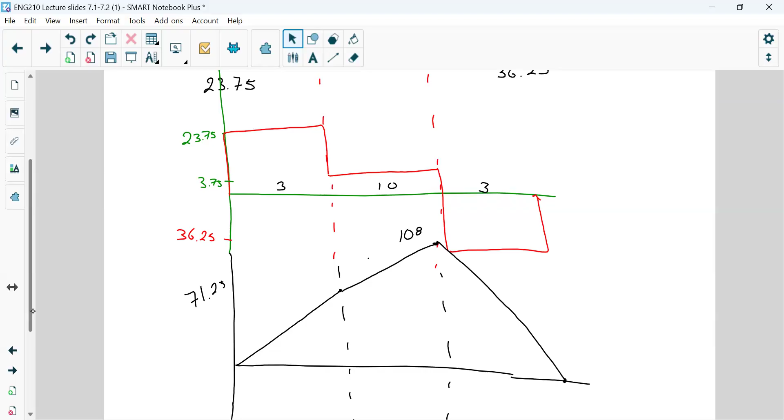No, because there will be, well it depends on where we get. So there will be some lecture between the 4th exam and the final. So you're guaranteed those problems.